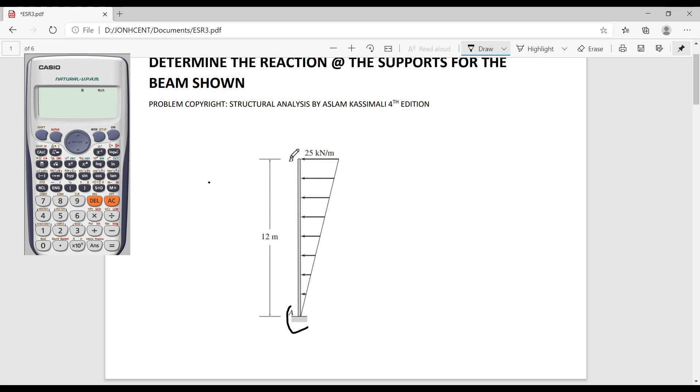So, meron tayong example dito uli. We have to determine the reaction at the supports for the beam shown below. Okay, so we have this setup. So, this is A. Ito yung support niya lang. Fixed, then patayo, 12 meter with a load, 25 kilonewton per meter. So, yung 25 kilonewton per meter, also known as UVL. UVL stands for the Uniformly Varying Load.

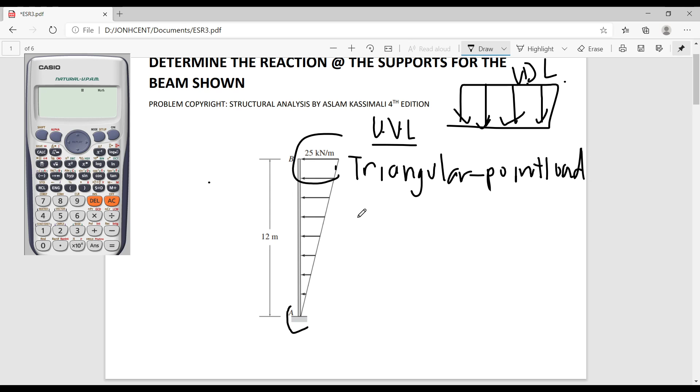Okay. Yung previous video, kapag ganito yung given, this is called UDL, also known as Uniform Distributed Load. Then, ang ginagawa ko dito, I make the triangular load a point load para hindi na ako maglalagay sa equation ng 1/2, 1/2, 1/2. So, I make 1/2 base times height. So, ganun yung pag-convert ng triangular load to point load.

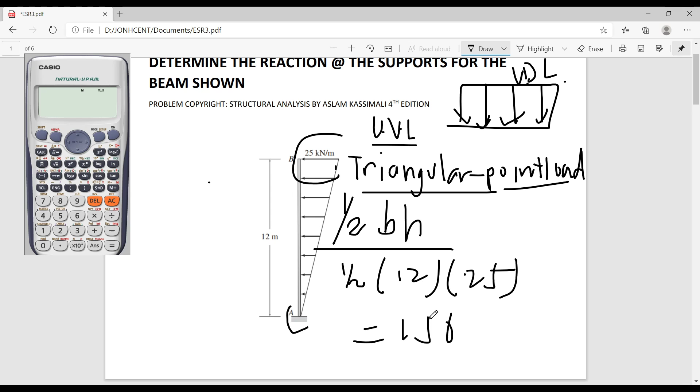So, that is 1/2. What is your base? Your base is 12. Your height is 25. So, the point load is 150 kilonewton. Okay? So, dito, after nyan, I draw the assumed free body diagram for the supports. So, obviously, this is AY.

This is AX, to resist the force on the X direction, dahil ito ay paganyan. Although, pag natumba yan, pa-incline. So, kailangan ng resist which is X. Then, I draw also the MA or the moment at A na kailangan mag-resist since ito ay pabagsak ng paganyan. So, kailangan niyang i-resist. So, paganyan ng aking MA. Okay?

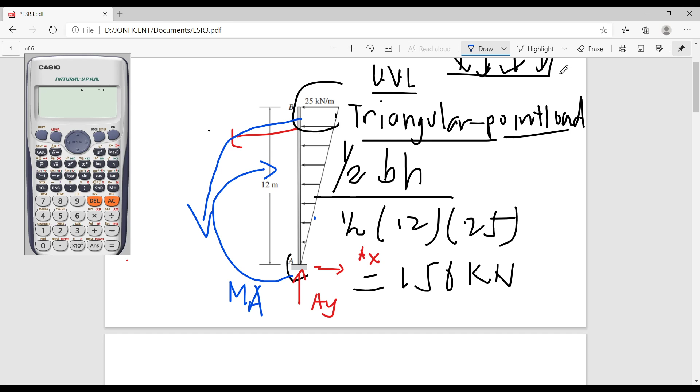So, next niyan ay summation of forces X. Since meron tayong forces sa X, so that is AX. Positive ang aking AX minus 150. So, ito siya. Andito siya, di ba? Somewhere here, which is the 1/3 from the B. So, minus siya kasi papunta siya doon. Minus 150 is equals to 0. Therefore, ang ating AX ay 150.

Kilonewton. Okay? Then, summation of forces Y is equals to 0. AY is equals to 0 dahil wala namang other force na paganyan. Next, mag-moment at A na tayo. Summation of moment at A is equals to 0. I assume clockwise as positive. So, that is MA. Pa-clockwise ang aking MA kaya positive.

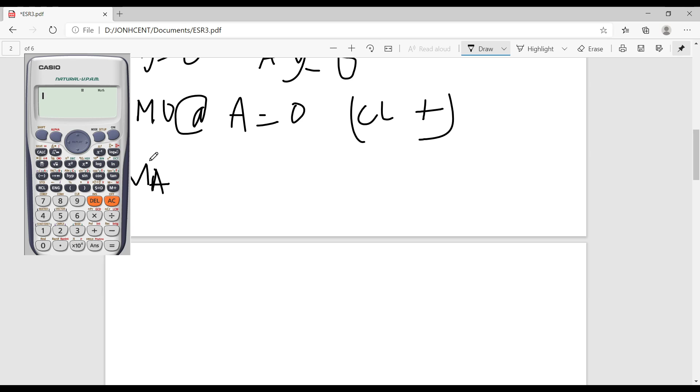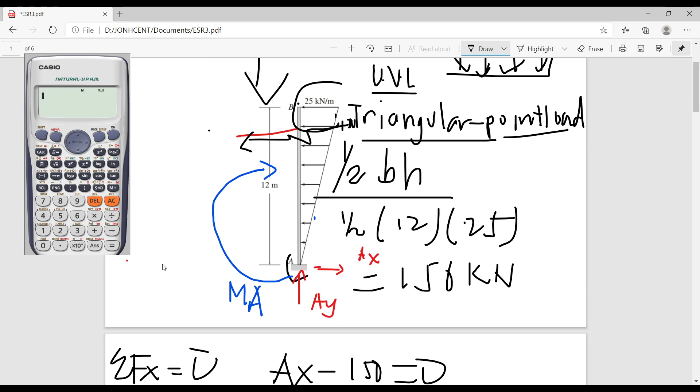Minus 150 times 8 is equals to 0. So, si 150 ko ay papunta ng counterclockwise. Okay? So, pag ganun siya, kaya magiging negative. So, solve natin.

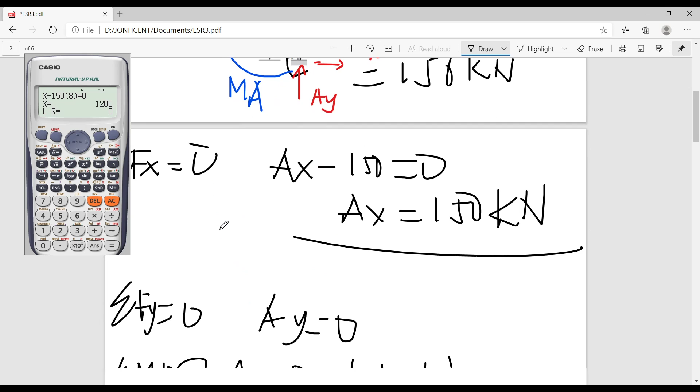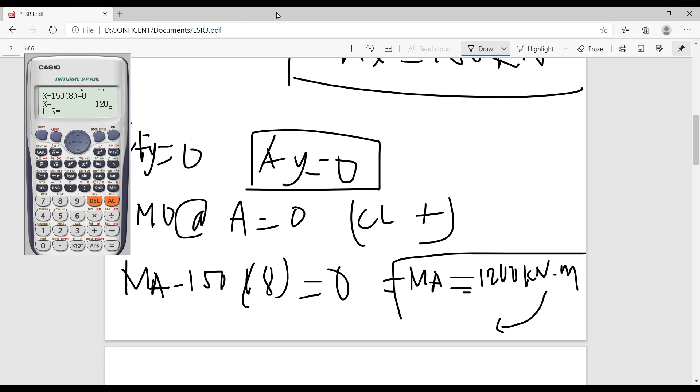So, we have MA as 1,200. So, our MA is 1,200 kilonewton meter and that is clockwise. Okay? So, tama ang ating assumption. So, ito ang ating sagot. 1, 2. Then, pwede na hindi isama si AY kasi 0 lang naman ang kanyang value. Okay? So, that's it for this example.